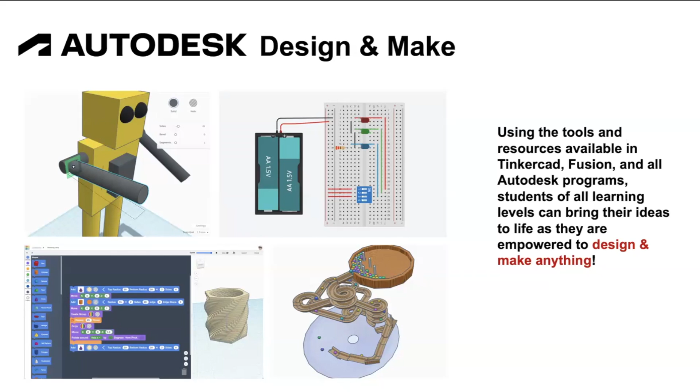And that is what Design and Make is all about. Talking about all the amazing things that your students can use, the tools that they can use to empower their ideas, to bring their ideas to life and really design and make anything. So that is exactly what we want to do. And in tonight's webinar, we're focusing on designing and making with lasers, as well as some other things. It's called Design and Make with Lasers, but we're going to slide in some other important content as well, because these skills are pretty universal and can connect with a lot of different things.

So first and foremost, what is a laser? Well, this describes a machine that uses a beam of light to cut and engrave and remove material. Lasers come in all different sizes. There are small little desktop lasers. There are huge industrial lasers that are used to manufacture tons of products. And I'm specifically talking about beams of light used to do cutting and manufacturing. There are, of course, other types of lasers, like laser pointers and laser cameras. That's not necessarily the same type of light that we're focusing to actually use for manufacturing processes, but it is a tool that can be used to manufacture parts.

And as we talk about our manufacturing groups, there are really three groups of machines that are commonly used in mass production. We have additive manufacturing, where you add material to make a product. This is where 3D printers live. 3D printers will either melt rolls of filament or harden liquid resin, and it will continue to build material layer by layer, and that's adding material to make your product.

Subtractive manufacturing, you would put in your material, like a block of wood or a piece of plastic or a piece of metal, and then that machine would remove it either through a carving method, for example, using a carving mill, which can cut away material, and we talked about that in one of our Level Up with Fusion webinars when we learned about CNC production, or a laser would actually use an engraving process to burn away material.

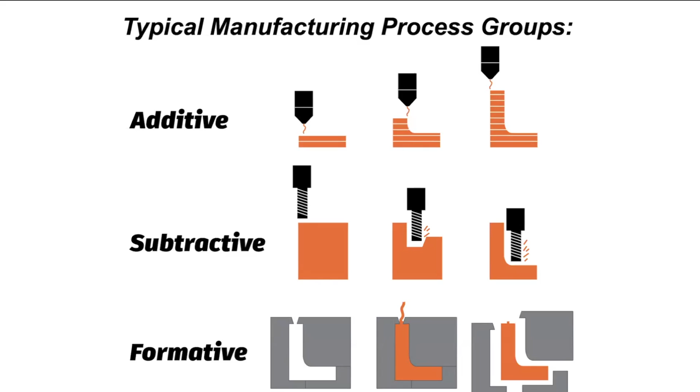And then, of course, there's formative manufacturing, where you might have some type of mold and you pour your material, usually a liquid plastic or something like that, into the mold, and then when you take the mold away, you have your part. And these are used in all different forms of manufacturing. As we talk about lasers, it's important to understand that there are a lot of different types of subtractive manufacturing lasers, and they vary based on size and primarily the types of light sources that they use.

So the smallest and the most affordable laser is typically a diode laser, which uses a really high-powered diode, almost like an LED light bulb, but it's more intense than what you might find in a flashlight, and it's a focused beam of light that can really engrave. Diode lasers don't really cut very well unless it's thin cardboard and paper and things like that, but they can engrave very well, and again, they're very affordable.

Another really common type of laser, and a slightly more industrial one, are CO2 lasers, which use a tube of essentially charged particles and CO2, and focus that beam of light. These lasers are way more industrial, so they can cut and engrave much thicker materials, typically up to quarter-inch wood or so, or give or take 5-6 millimeter wood, or more, depending on the power. They come in a lot of different sizes, and they might be able to etch metal, like aluminum, but they really don't cut metal very well.

To do that, you would need an even more industrial type of laser, like a fiber laser, which can cut metal, or plasma, which technically isn't a laser, but it kind of falls within the same category, because again, we're using different types of light sources or beams of energy to actually cut through our material.

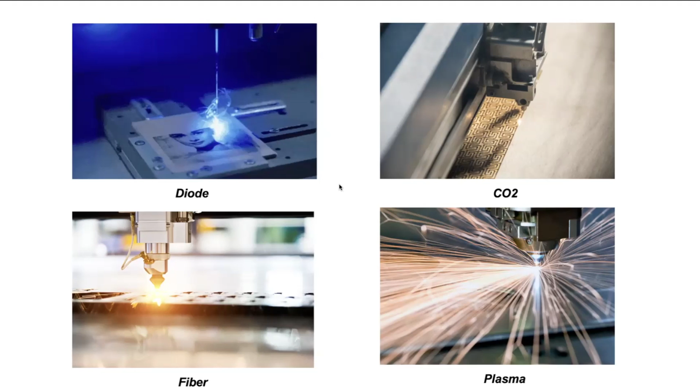And plasmas are much more industrial and do cut through metal, and are used to make a lot of different types of metal products and things that you might see. So as you are choosing the laser for, let's say, your instructional space, if you don't have one, as you can see, there's a lot of different options, and you would essentially have to weigh your budget to purchase one, as well as the types of projects you want your students to be doing, as well as the type of space that you have, right? How much room do you have for these types of things? But just note that you have lots of options.

The other great thing about lasers is they work with a lot of different materials. So you're not just using a laser for plastic like you might be with 3D printing necessarily. Many lasers are able to cut and work with paper, cardboard, wood, foam core, acrylic, a wide range of materials, and they also operate rather quickly.

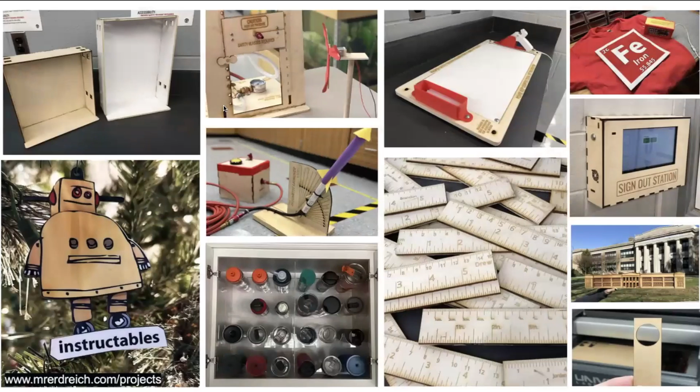And personally, these are just some of the projects that I've taken from my makerspace here. I use lasers in my classroom for lots of different projects. One of my favorite projects for my older students is challenging them to make their own ruler and then use that ruler for the rest of the year, which is a good way to also teach CAD skills. But even using lasers just to make things for my classroom, like sign out stations or rigs to launch rockets and organizers and whatever it might be. This bottle holder is from my home, not for my classroom, but again, just making things for around the house. So it's a really versatile machine that allows you to work with a wide range of materials.

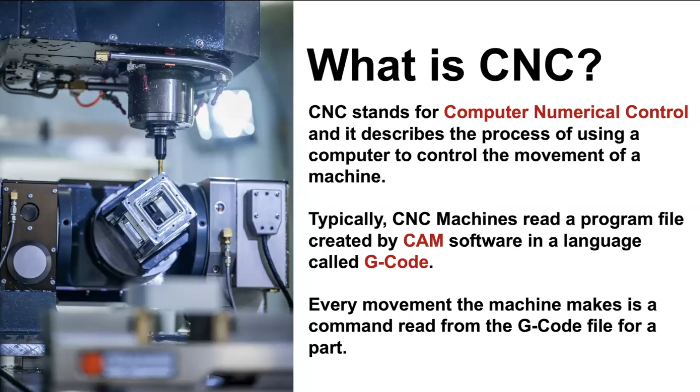Now, I mentioned earlier the term CNC. CNC stands for Computer Numerical Control, and it describes a process of using a computer to control the movement of a machine. And there are a lot of different types of CNC machines, and all CNC machines work in a very similar way. So CNC machines essentially allow us to use computer code, a coded file, to manufacture our different designs. And when we say the term CNC machine, we're usually referring to either a mill or a router, a lathe, a cutting machine like a laser or a vinyl cutter or a waterjet cutter or a plasma cutter, or a 3D printer.

And I bring this up because while these machines perhaps operate in a different way, and while they potentially allow you to work with different materials and a wide range of projects, the skills that your students would have to learn are very common. So, for example, designing for a laser cutter is a very similar process to designing for, let's say, a vinyl cutter to make a decal or a t-shirt.

So I know many of you attending this might not own your own laser, and that's perfectly fine, of course. I'm glad that you're here to learn about what they can do and how the skills that your students are learning can allow you to access these types of things. But just note that these skills aren't only for laser cutting. They're universal for these types of machines. So I'll show you later on how you could do something similar with, let's say, a vinyl cutter to make a vinyl sticker. And even still, the types of skills that allow you to work with laser cutting can also be used for 3D printing or working with mills as well.

So teaching our students manufacturing processes in general is a really fantastic universal skill. They might learn how to use one machine in your classroom and then go off and have a future career and be able to transfer those skills to an entirely new experience.

Now, what makes lasers unique compared to some of these other CNC machines is that they're actually two-dimensional. And that doesn't mean that we're only making perfectly flat things. Of course, there's three dimensions to any physical object we can hold, but they only have two operating axes, typically. And what I mean by that is the types of travel our machines can do are called axes. So for example, a 3D printer, which I think many of you might be familiar with, can travel in three axes.

It can move left and right, which might be X, forward and backwards, which might be Y, and of course up and down, which might be Z. A laser typically just moves in X and Y. And the third dimension of your part that you make with the laser actually comes from the thickness of the material. So let's say I put in 1/8 inch or 3.175 millimeter wood in my laser. That's how thick or how tall my part will be.

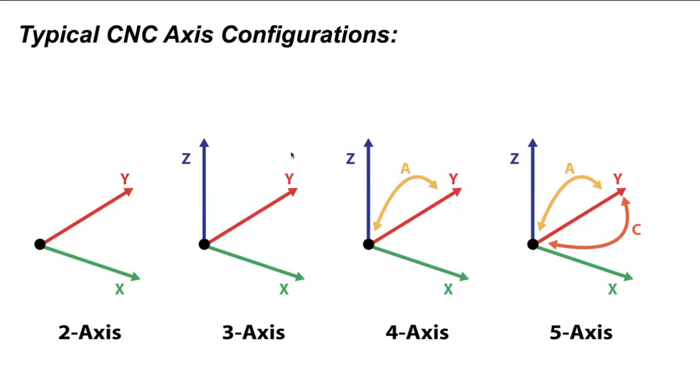Now, before we dive into actually how to design for lasers and get into some hands-on projects, let's talk laser safety, because if you are considering getting one, there's a few things you need to know. So first and foremost, as I mentioned, all lasers use a beam of light of some type to cut things. And those emitted lights can be harmful to your eyes. So first off, a lot of lasers have a tinted, protective canopy. So the glass would actually be covered, and it would allow you to look at the laser, and the glass is tinted, and your eyes wouldn't be put at risk.

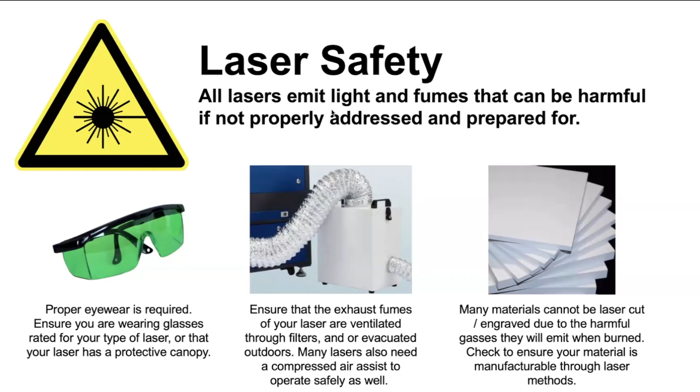And then there are some materials that cannot be laser cut. So if there's a material that when it's burnt will emit toxic gases, like, for example, PVC, you don't want to burn PVC, right? As I mentioned, there's a lot of different materials that you can use, but you have to make sure that the materials that you're using, the glues or the resins that made that material, are not toxic, or else burning them could be hazardous, even if it is being vented. So a couple unique safety things that we need to consider for working with lasers, especially in the classroom, that we don't necessarily have to consider with other types of manufacturing processes.

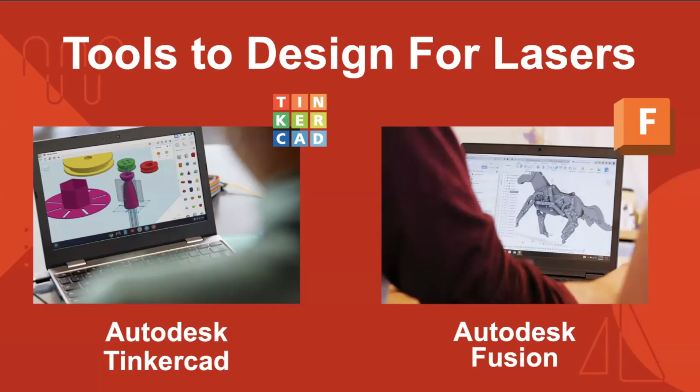Now, let's get into how to design for these things, right? So we have two programs that we'll talk about tonight. We have Tinkercad, which is fantastic for younger students or students just getting started with CAD. And then we have Autodesk Fusion, which is a much more industrial, much more advanced CAD program, which is well suited for students at the high school age group.

So both of these applications can be accessed via an app or a browser. So you can log on to Tinkercad or Fusion in the web browser on pretty much any device. Tinkercad also has a wide range of apps for tablets, and Fusion has an offline version for Mac and Windows computers. Autodesk Tinkercad and Fusion are completely accessible for free for students and educators.

So let's say that you have younger students and you want to be able to manage their passwords. You can actually create their accounts in Tinkercad as a teacher. And again, even for Autodesk Fusion, you have to create a free account to be able to access it, but both teachers and students can access it, although there are age restrictions based on your region. So for example, in the United States, that would be 13 years or older. And again, that would vary depending on where you are for Fusion.

Teams and classes are two different resources that do a very similar thing. So in Tinkercad, you can create a class, and this would allow you to have your students join your class. You'd be able, as a teacher, to see their work, go into their assignments, provide feedback, things like that, and be able to see what students are working on.

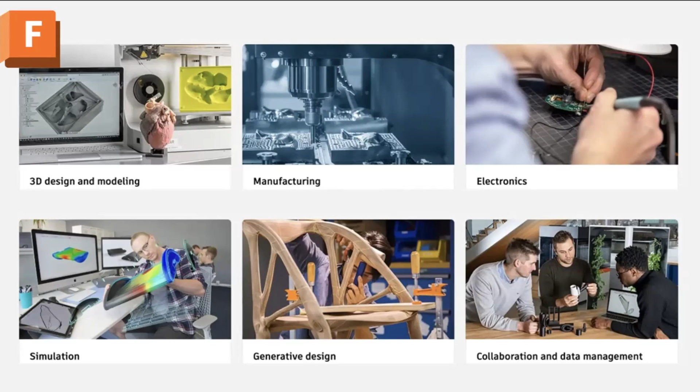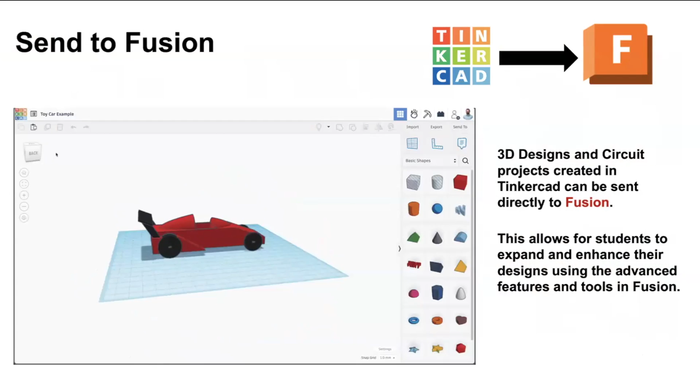And there's also another cool feature, which I will show you in just a few moments, which is how to send your designs from Tinkercad to Fusion, which will allow your students who maybe have been working with Tinkercad for a long time and are ready to kind of elevate their skills to a higher skill level. They can easily transfer their designs from one program to the other to be able to access the more industrial, career-focused skills and features of Fusion.

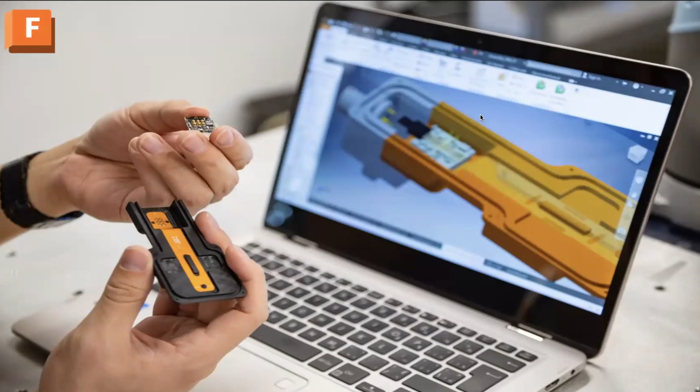And the reason that you might want to do that is, of course, Fusion is designed to mimic what professional designers and engineers are doing. So Tinkercad is designed to be a very easy to learn, very intuitive design program for students of all ages to kind of get started with CAD and manufacturing. And then Fusion is designed to allow students to access all the tools, all the resources that a professional designer or engineer might have, so they can really bring their products into that real world scenario. And again, tonight we'll be looking at both from the lens of designing for lasers.

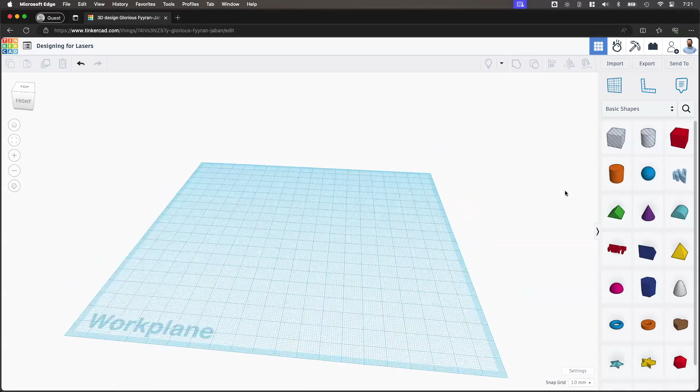So I'm going to flip my screen, and I'm going to head over to Tinkercad first. We'll look at Fusion in just a bit here. All right, so I'm signed into a Tinkercad design, and I have just an empty 3D design here. And if you've never used Tinkercad before, we're in the 3D design space. And the way that the 3D design space works is that you can essentially grab these different shapes, and I can manipulate the shapes. I can kind of lift them around and move them as I go.

And you can see that there's measurements on the corners of the shapes here. I'm currently working in millimeters, but I could change my unit, and I could work in another unit if I wanted to. And if I wanted to, I can actually click on these dimension boxes and punch in dimensions for my model.

And I can grab multiple shapes and I can combine the shapes. So for example, if I were to grab this cylinder shape and put it on the corner of my box shape like this, and if I were to select both these shapes and group them, I now have this solid part as well. And in addition to having solid shapes, you'll see that we also have this option for hole shape. So if I ungroup this and if I turn the cylinder into a hole, and now I group my two shapes, I actually cut.

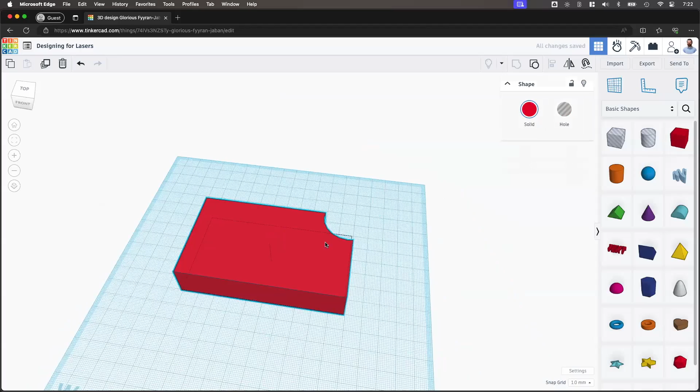So we can use hole shapes to cut into solid shapes and solid shapes to make solid parts for our design. Now, the biggest difference I need to explain: typically when people are just getting started with laser cutting or designing for, let's say, a vinyl cutter or something like this, using a 3D design application like Tinkercad's 3D design space we're in now to design for 2D can be a little difficult to learn at first.

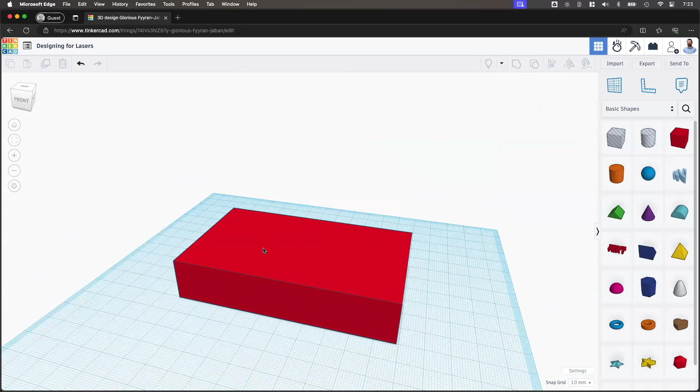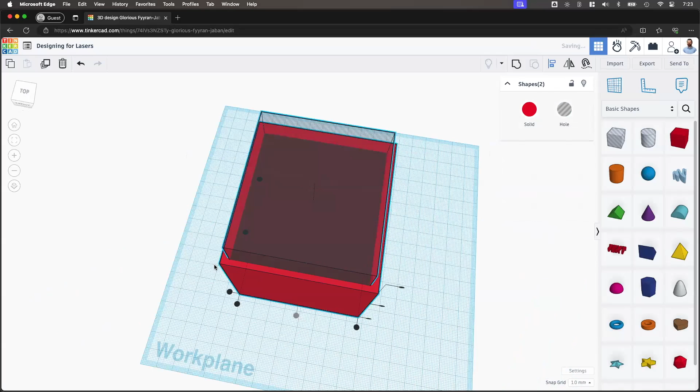So for example, let's say that we want to make a box. Okay, so I'm just going to make my box a little bit bigger. All right, and I'm going to hollow out my box. So I'm going to duplicate this. I'm going to make this a little bit taller and a little bit smaller and raise this up a bit and set this to be a hole. I'm then going to select both shapes and use my align tools to align my shapes. And when I group them, I have a box, right?

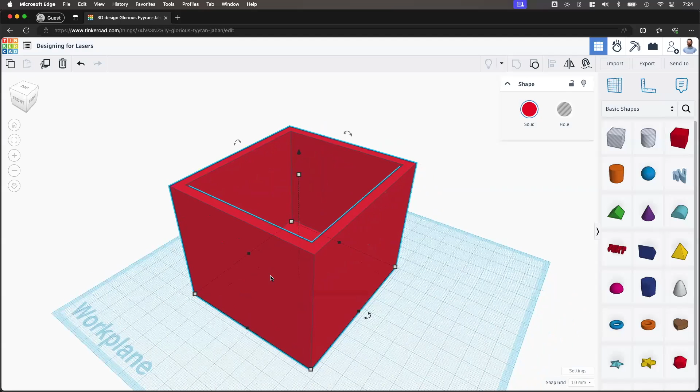So here's my box. Now, if I wanted to 3D print this box, I could just hit export and download this for 3D printing. And I could 3D print this box, assuming that my 3D printer was big enough to print it. But if I wanted to laser cut this box, I can't do that. And that's because we learned that lasers are really two-dimensional machines. They can make 3D things, but they can't necessarily make a 3D thing like this. It can't add material, and I might not be able to fit this. So if I wanted to make a laser cut box, I'd have to design this in a completely different way.

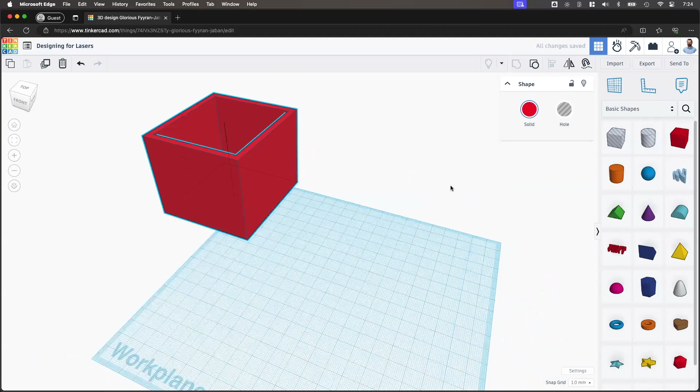So I'm going to leave this box off to the side. This is our 3D printable box. If I want to make a laser cut box, I would actually have to design this in, let's say, flat panels, where I might make a wall like this, and I might copy this wall a few times. Let me rotate this around. Line up my walls here, copy this again, and let me just make one more copy, and we'll give ourselves a bottom of our box. I'm not really putting too much time into my measurements right now, so forgive me, but this is also a box, albeit slightly bigger because I didn't measure it. Let me scale this down a little bit so they sort of match, right?

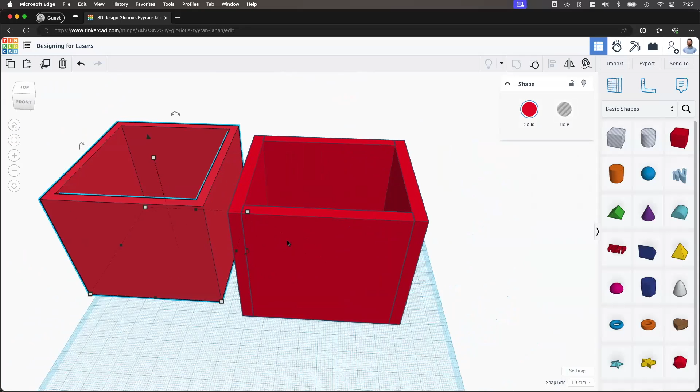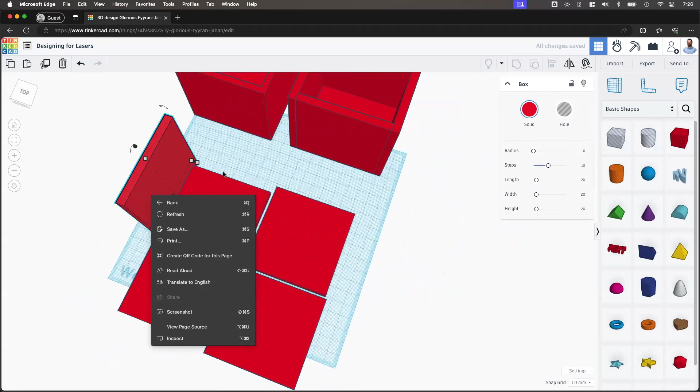So this is a solid box that could be downloaded for 3D printing. This box has been made out of panels, flat panels. And if I wanted to, let's say, laser cut this box, what I could do is I could take my panels and I could space them out and lay them down flat for manufacturing like this. So I might design my box in 3D, how I want it to look. And what the laser would need, because again, lasers are two-dimensional machines, is a flat packed design here, where I have all of my pieces for my box laid out like this.

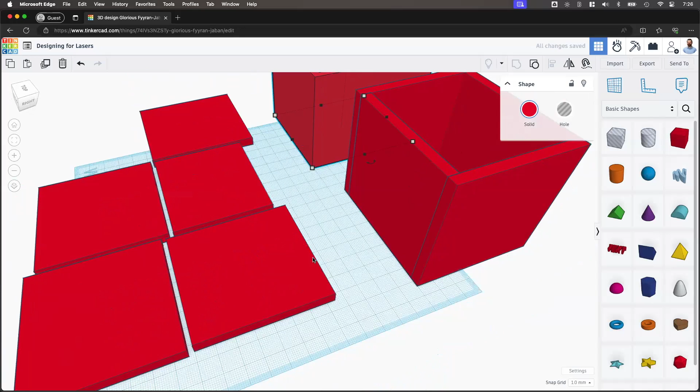And then what I could do is I could cut these 5 panels out of, let's say, wood or something like that. And after I cut those 5 panels, I could then assemble the box to be 3D like this using glue or something, right? So they would fit together. And that's the biggest difference. With 3D printing and with laser cutting, you can make very similar things. Again, we can make boxes, name tags or keychains or lots of other types of projects, parts for catapults, etc. But 3D printers are adding materials, so you can make solid 3D shapes like this. For lasers, we kind of have to think in terms of two dimensions, right? So again, designing these flat panels like this. And that's the biggest difference here as we're considering designs.

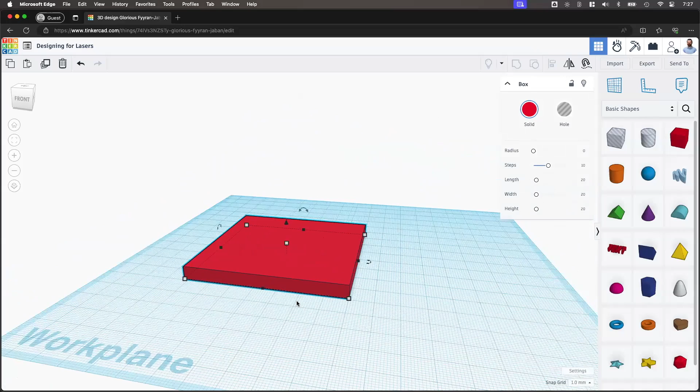Now, the next thing I want to talk about is what does the laser actually see when we go and download? So I don't really need these boxes, so I'm going to throw them away, and I'm just going to keep one of these panels. When you have a design in Tinkercad and you download it for laser cutting, all the laser sees is what's touching the work plane. Because essentially what happens is your design is flattened, and the part that's touching the work plane is what the laser will see.

So for example, let me make this part slightly more interesting. Let me add, let's say, 2 holes to this plate, like this, and let me grab another cylinder. Now, if I raise this cylinder up off the work plane like this, when I download this part for laser cutting, it won't see it at all. Because again, it only sees the features that are touching the work plane.

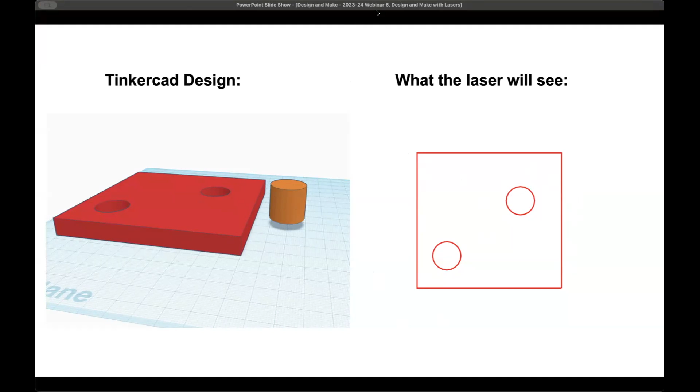Now, if I head back to Tinkercad, which I'm doing slightly slowly, here we go, back to Tinkercad. Let's say that I delete this cylinder, and let's say that these holes don't actually cut all the way through. They just sort of score the top. All the laser is going to see is, again, what's touching the work plane. So it's not even going to notice that these holes are here.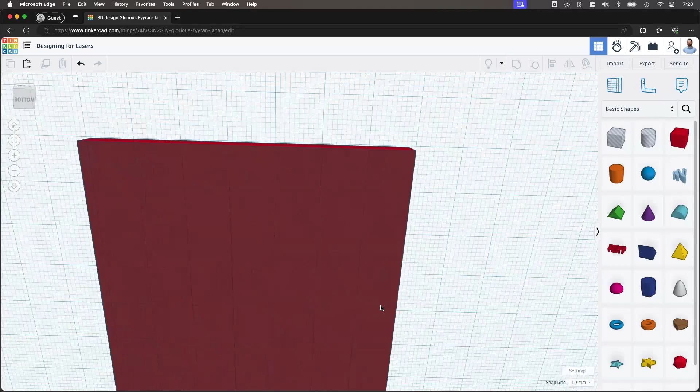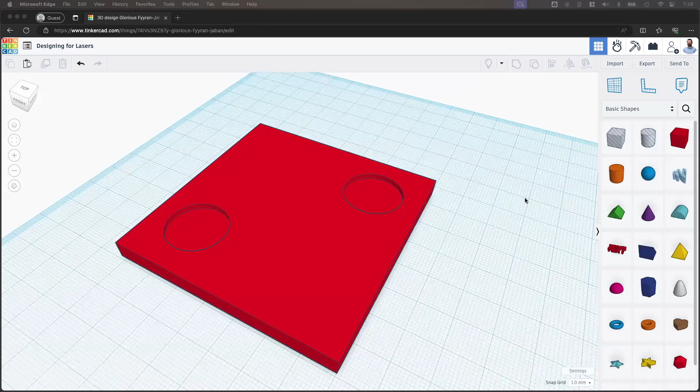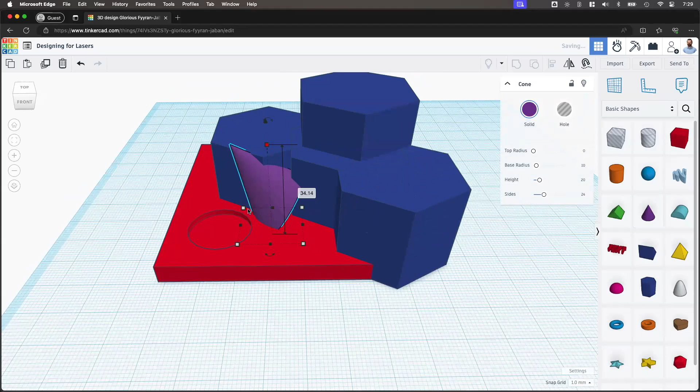Let's say that I make a really elaborate design like this, and it's 3-dimensional and looks kind of cool. And there's some type of cool cone thing happening over here, some type of crazy shape. And I group all this together. If I were to download this for laser cutting, and let me just fix my cone because I'm actually poking through, please hold. Okay. If I were to download this for laser cutting, all that would be seen is what I can see from the bottom, right here.

And to emphasize this, I'm going to turn off my little work plane just temporarily. This is what the laser would see. It would miss all of these parts that are sticking up. So the height of the model, all that's kind of irrelevant.

Let's say that I really was trying to make this box that I showed you earlier, and I had these flat wall panels. The thickness of the panel in Tinkercad doesn't actually matter. Right now, this is set to be 20 millimeters. But if I put in 3-millimeter wood in my laser, then this panel, if I cut it, would actually be 3 millimeters. So you have to remember that we're using a 3D editor to make our designs. But again, as we download these things, it will see what's touching the work plane.

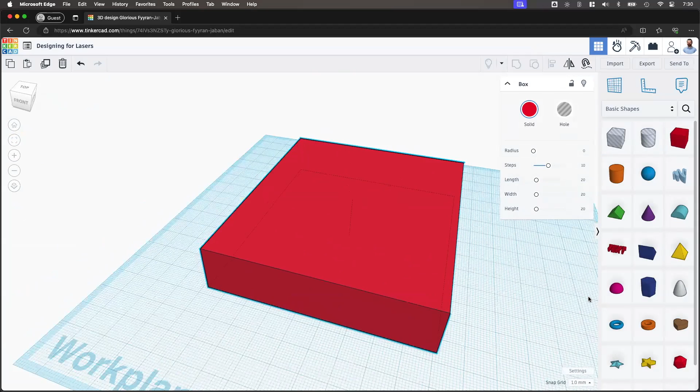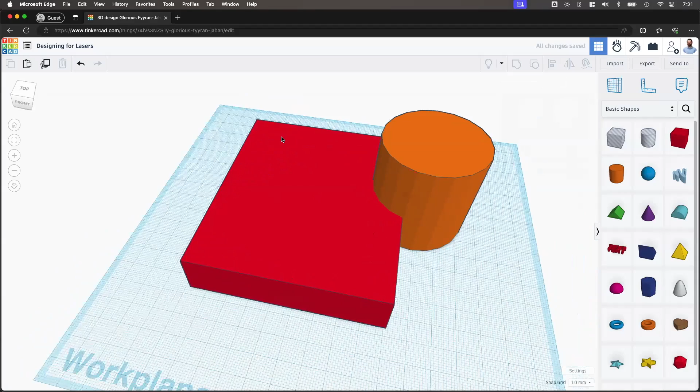Now, something that I've been doing to make my life a little bit easier here is I've been changing my view a lot. When you're designing in 3D, you often need to change your view to be able to see things accurately. So I'm orbiting around, I'm looking at things differently here. And when we design in 2D, something that we like to do often is look at the design from the top view. So I might click on the word top here.

But you'll notice that there's still 3D shadows happening. And that's because even though I'm looking at it from a top view, I'm still in a 3-dimensional perspective. So something that I can do is toggle my perspective right here by pressing this button at the bottom of my sidebar. And if I switch it to orthographic view, watch what happens to my shape. Specifically, look at the side of this cylinder here. It will flatten the cylinder.

And it puts me in a 2-dimensional perspective view, which makes looking at flat designs a little bit easier. So it allows us to design things more simply. It allows us to design things from a 2-dimensional perspective, like what a laser would see.

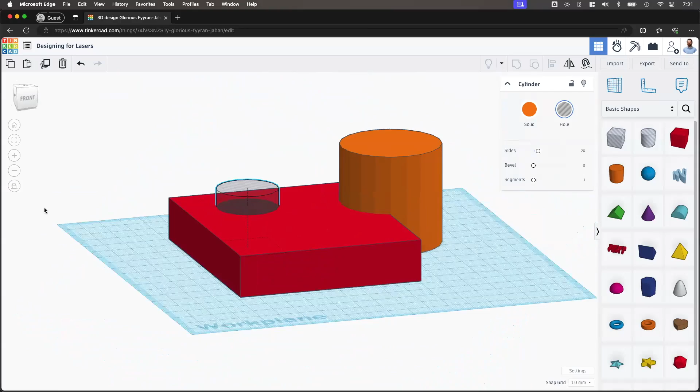And if I orbit around, if I'm in an orthographic view, everything looks kind of funny. So we want to make sure that if we're working in 3D like this, we're working in our 3D perspective view, so everything looks as it would if it was in the real world. And if we want to look at something from the top, we switch to our orthographic view so it represents what it would look like for our laser.

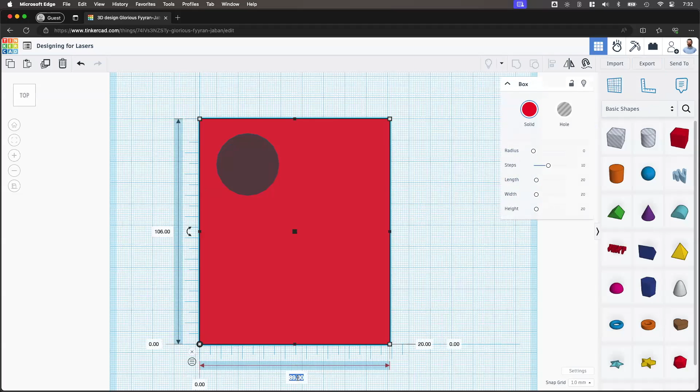Something else that's really, really handy is that lasers are very accurate. They're very accurate machines, which means that we can put pretty accurate and tight tolerances. So what I just grabbed was the ruler tool, and I dragged the ruler out to the corner of my shape. And we can use the ruler tool to accurately place dimensions on all of our shapes.

So I can not only put dimensions on the parts, I could use the ruler to set dimensions and distances between parts. So for example, because I have the ruler in the corner of my shape here, I can set the distance from the edge of my hole to the edge of my plate to be exactly 15 millimeters, and you'll notice that it's moving it around.

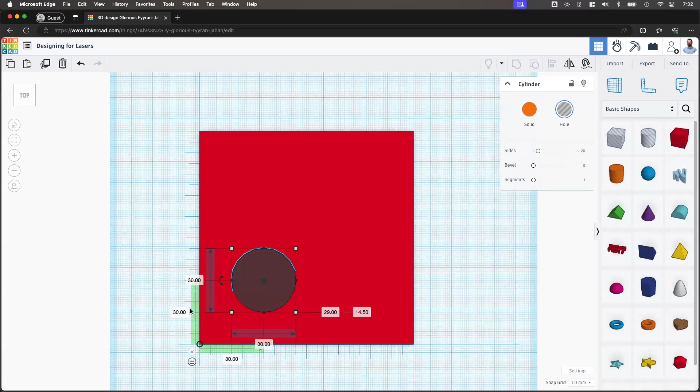You also notice that right now it's measuring from the edge of my cylinder, but I can toggle between using the edge or using the middle. So now I'm setting the dimensions to be from the center of the cylinder. And let's say, for example, I wanted this to be 15 millimeters from this edge. I could always move my ruler over to this edge now and flip the ruler around and then use the ruler to set the same dimensions on this side as well.

So because our lasers are quite accurate, we can strive to make really accurate and well-dimensioned designs in Tinkercad as well. And using the ruler tool is a great way to do that. Another one of my favorite tools to use when designing laser cut projects, especially for making boxes, is the duplicate and repeat tool. So let's say that I want to make a box where the panels sort of interlock, rather than having to use glue.

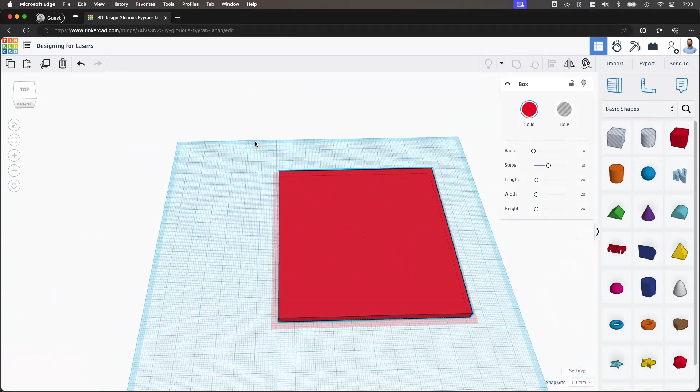Well, what the duplicate and repeat tool does is it allows me to not only make copies of shapes, so bear with me for one sec, I'm just going to make one little tooth here for my box. So here's my first tooth that's going to overlap, kind of like a dovetail joint if you're familiar with woodworking. And I want to make a bunch of copies of these, but not only do I want to make copies, I want to move them.

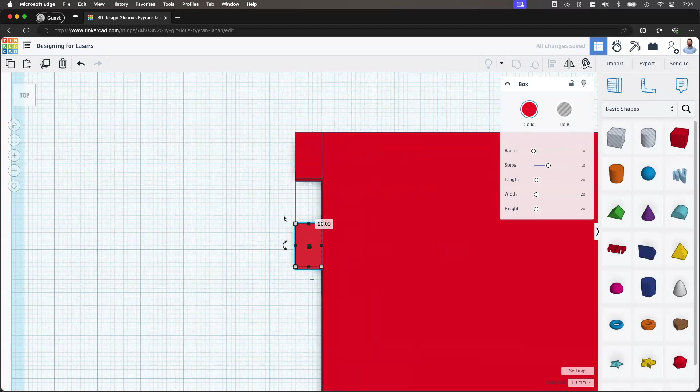So I'm going to press duplicate and repeat, and let me just set this to be a specific size. Okay. I'm going to press duplicate and repeat, which is right here. And I'm going to move this piece 20 millimeters without letting go. So without clicking away, I just moved it 20 millimeters. Now, when I press duplicate and repeat, it not only copies this piece, it copies and moves it the same distance. So it moves it 20 millimeters.

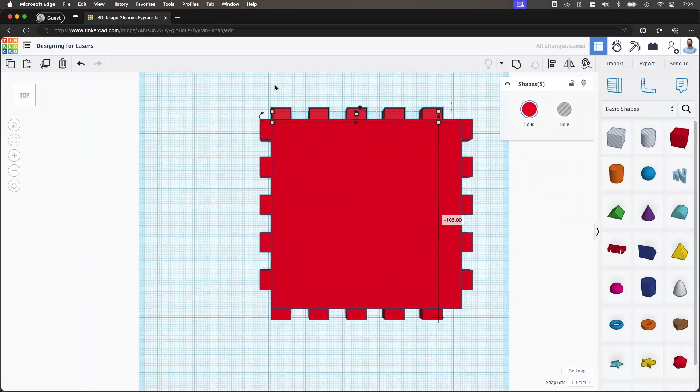And then, of course, I could copy these and bring those over there, and maybe copy them and rotate them and bring them over here, and then bring them over here, and group all these pieces together, and I have a nice little dovetail box where if I then grab the second one and flip it around, these box panels would fit really nicely like that.

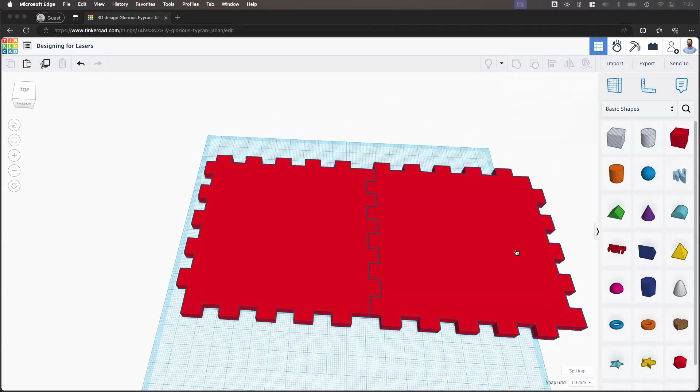So duplicate and repeat, really awesome tool. Not just for laser cutting, but I find that we do a lot of patterns and types of cuts in typical laser cutting projects, and that tool is super handy for that. And another really cool thing that you can do, which we actually talked about in our Artscapes webinar a little while ago, is importing SVG images.

So we can press this import button and we can import SVG image files. Give me one sec, I'm going to drag and drop one right on here. All right, and SVG image files can be made in a lot of different programs. For example, we're going to make them in Tinkercad, but you can also make them in other types of photo and graphic design editors and things like that.

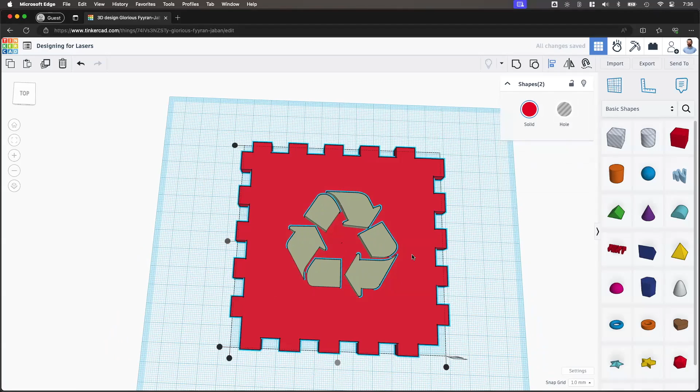You can also find SVG images that are free for use all over as well. And this is just the recycling symbol that I've imported, and obviously it's a really accurate logo. I think this would be a rather difficult shape to make in Tinkercad, but I could import this image and, let's say, set this to be a hole and group it. And now when I would download this for laser cutting, this would now have this nice logo here that I could then go ahead and cut out of my box panel by importing that type of image, so SVG file types.

I set this to be green just because it reminds me of recycling, but it's important to note that color wouldn't transfer. Again, when it downloads this design, it downloads just the bottom profile. It doesn't know that this is green or whatever the color it is. That would come from the material. So if I were to put green acrylic or green plastic into my laser to cut this panel out, it would then be green. But the file won't distinguish color in your design. It just downloads, again, whatever is touching the work plane is exactly what will be downloaded.

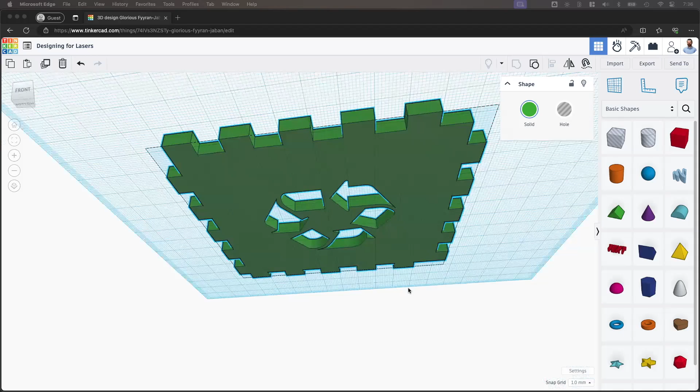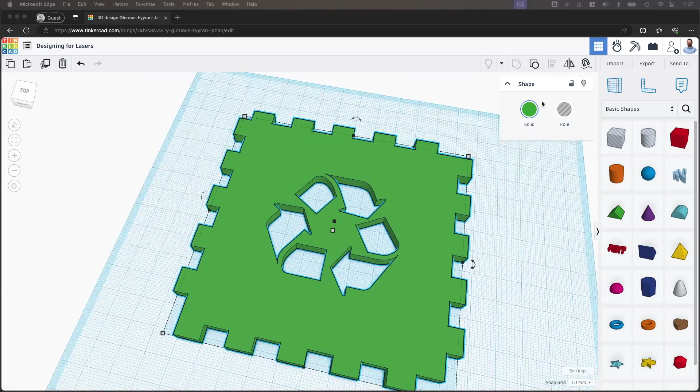And if I wanted to, for example, distinguish between cutting and engraving, so I might want to cut this outer edge, but engrave this inner recycling symbol, like burn it and etch it. That wouldn't happen here in Tinkercad. You would set those settings later on in the CAM stages, which we'll get to in just a moment. Now, if I want to download this, I would hit export. And I could click SVG to download this for laser cutting. And then I could bring it into my laser cutting CAM, which I'll show you in just a moment.

Before I do, I want to show you a couple useful tools in Fusion to do something similar. I know I have a lot of high school teachers with me here, so you might be considering Fusion. So let's say, for example, I want to send this to Fusion. I could click Send To. I could select Autodesk Fusion. If I wanted to, I could rename the file. If I was a student sending it to a class or a Fusion team, I could choose that here and I could send it to like Mr. E's period 1 if I was a part of that.

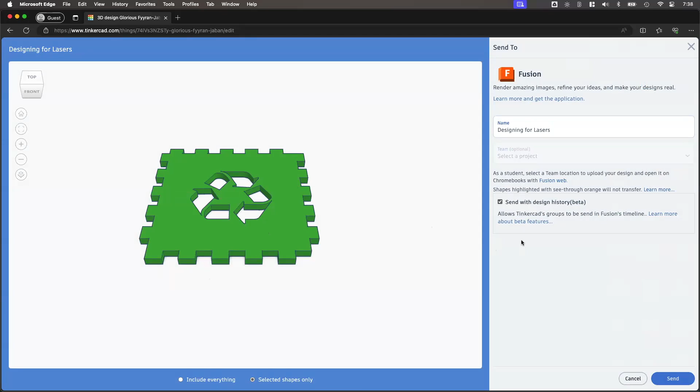And something that's new actually for Fusion is sending with design history, which will not only send the file, it'll send all the individual shapes that I created too. So I can actually go back and manipulate my Tinkercad design. So I'm going to send this and let me switch my screen here. Give me one sec to head over to Fusion. Here we go. All right. So here is my Autodesk Fusion that I have going on here. Oops, let me make this full screen.

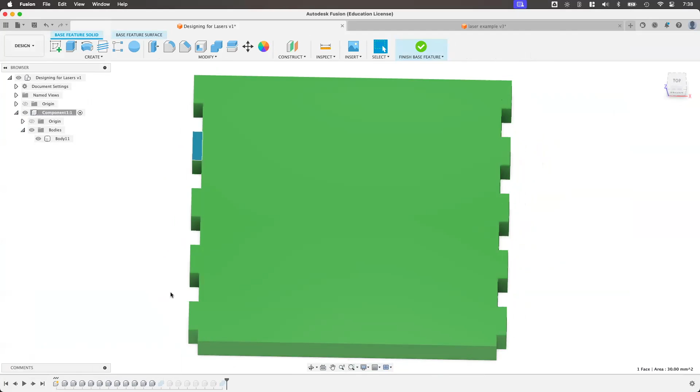All right. And here's my part, right? So here's my Tinkercad design that I've imported. And as I mentioned, I have this design history, which is down here at the bottom. So let's say, for example, I want to go back to before I grouped all these shapes together. I could do that. I could come back to this part and notice that all of these boxes are individual boxes that I have here before they were grouped. And that's actually a new feature. But when you bring something into Fusion, you can manipulate it.

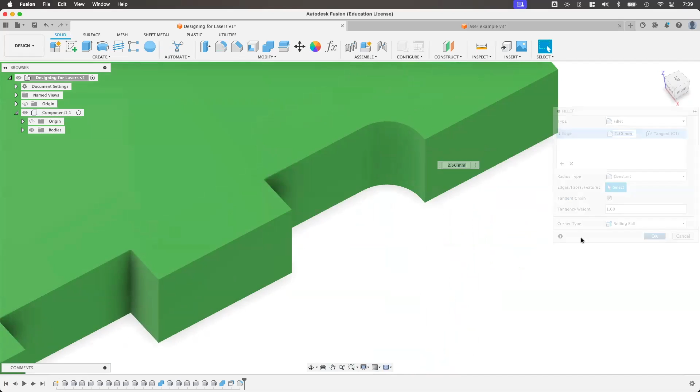So let's say, for example, I wanted to make something thinner or thicker. I could do that. I could add to this. So let's say that I wanted to round my corners. I could add a round on them. I, of course, could access all of Fusion's design features to manipulate my Tinkercad designs. I'm going to make a new Fusion design just to show you what if we want to start from scratch. So this is a brand new Fusion document.

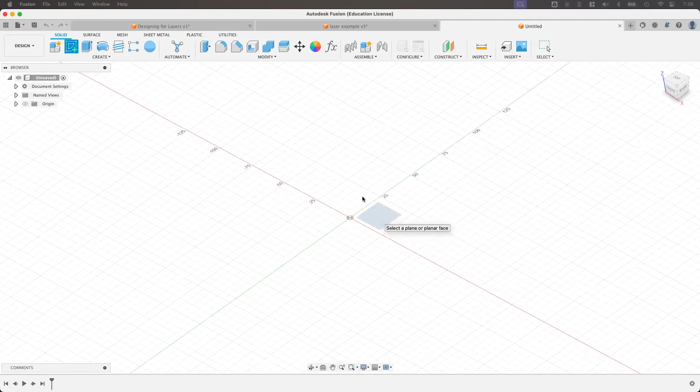And to start designing something new in Fusion, what we would do is we would start a new sketch. So I'm going to click this Create Sketch button and select one of my work planes. So I'll just select the top work plane. So we're kind of looking top down on our part, just like we did in Tinkercad. And I could use any of these sketching tools to design something. So I might grab my rectangle tool and set a box. And I could use the dimension tool to set dimensions, not 10.

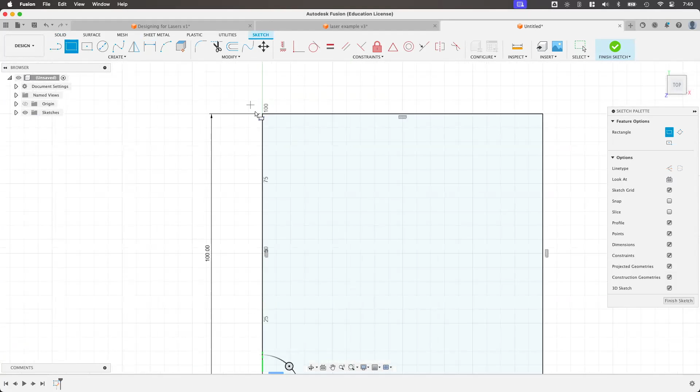I meant to say 100, like this, right? Let's say that I did want to do the same type of dovetail pattern that I did in Tinkercad. Perhaps I draw another box over here where maybe I set this to be 10 millimeters by, let's say, 3.175 millimeters. And we have a pattern tool in Fusion.

And I know I'm doing this rather quickly, but this is more to give you a sense of the differences between Tinkercad and Fusion. You can see that in Fusion, we can create sketches for everything that we would typically do as we go here. And in Tinkercad, you would start with a 3D shape, which differs, right? So in Fusion, we're not starting with 3D shapes. We're starting with a 2D sketch that we could turn into a 3D shape if we wanted to. There's lots of different tools for sketching shapes, for patterning shapes like this.

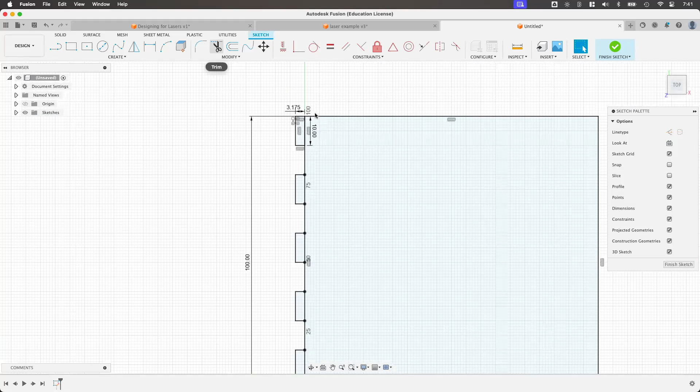You'll notice that because I drew a big box and a little box, these parts are not connected. So if I was actually going to laser cut this, what would happen is these little dovetail pieces would cut right off because there's this line here dividing it. But then I could use my trim tool to, let's say, cut away and turn this into a solid piece like so. So I could actually cut out this dovetail shape.

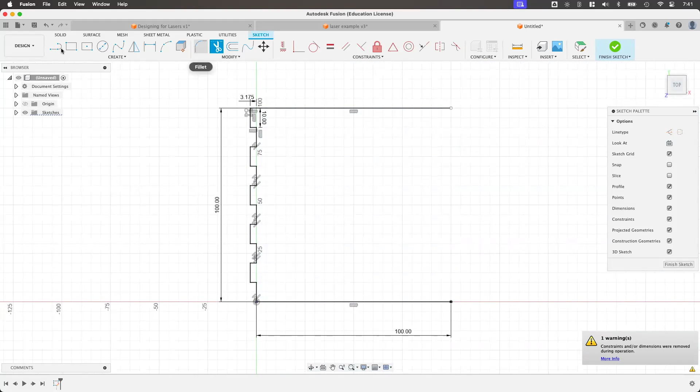And there's also some other useful tools like a mirror tool. So let's say I draw a line right down the center here. I could then use my mirror tool to say grab all of these dovetails on this side and mirror it across the center. And that would give me my dovetail box.

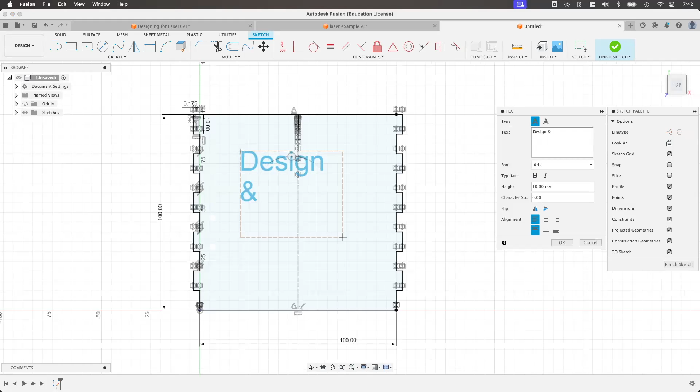And there's also a lot of other tools in Fusion. So one thing that you might find is you have a lot more text tools in Fusion than you might have in Tinkercad. Just a much more advanced text editor as you go with access to whatever fonts you have on your computer, which is also great, as we have here. And of course, I can kind of manipulate those things, right?

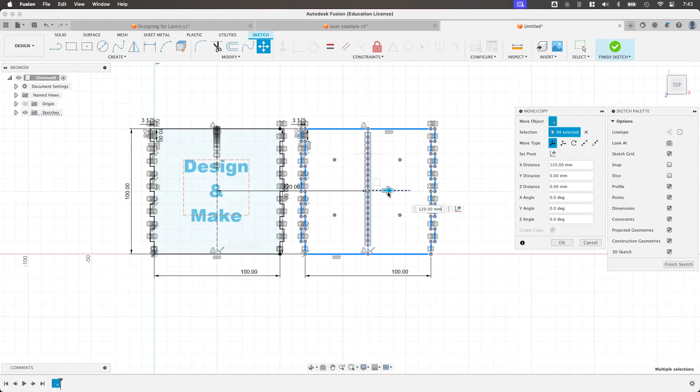And if I wanted to, I also could, let's say, make a bunch of copies of these, right? So let's say that we want to make a box. I might copy this a couple times. Let's do this once more, like so. I guess I would have to do it one more time. You do need 4 walls to work your way around the box. And now I have my panels. Now, when I press the checkbox, that will complete the sketch. So here's my two-dimensional sketch.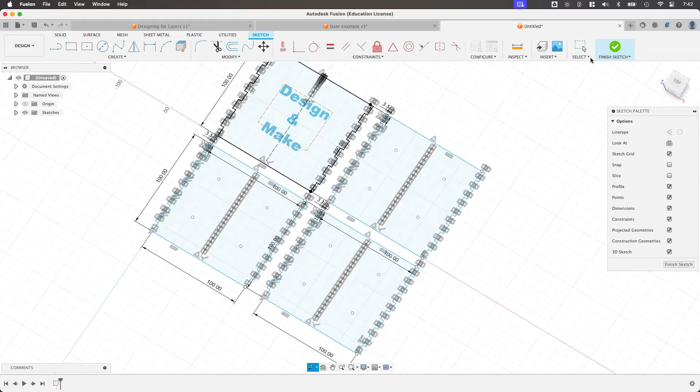If I want to 3D print this, I might go ahead and extrude these panels so they had some height to them, like this. And then that way they would be 3D parts, right? But for laser cutting, as we know, all we need is a two-dimensional sketch. So this would be ready to be laser cut. And I could right-click on my sketch and click Save as DXF, which will allow you to bring it out of Fusion and bring it into another program if you want to laser cut it.

But Fusion is not only a CAD program, it's also a CAM program, which means we can actually prepare our designs for manufacturing as well. And to do that, you would switch to your Manufacture tab. And here, we can actually say that we want to fabricate. You'll notice that there is a cutting profile along with milling for CNCs, turning for lathes, additive for 3D printing as well. But I could actually set up a laser cutting project, assuming that your laser cutter was compatible, right?

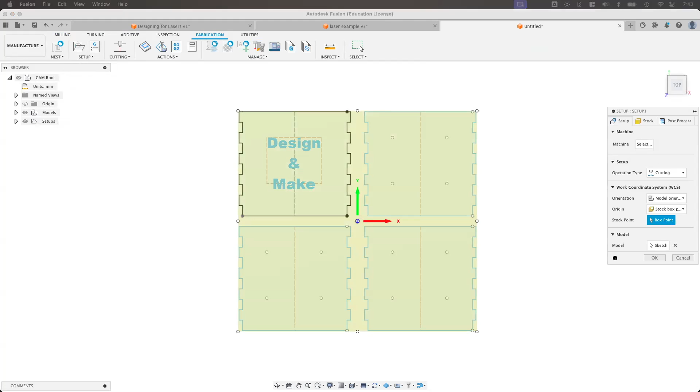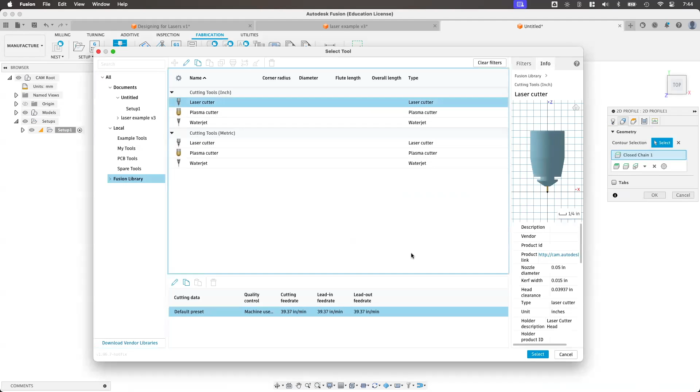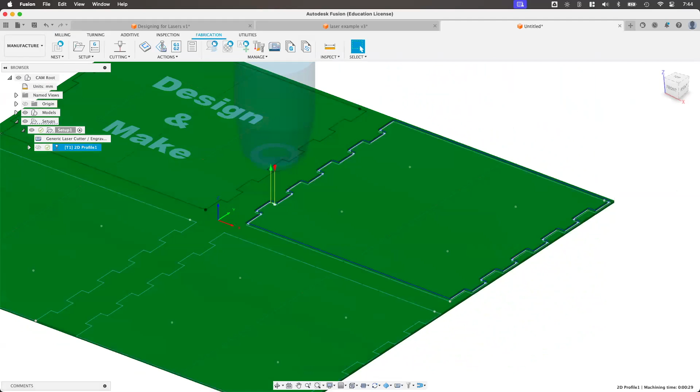But I could actually simulate and see that Fusion is set up to program a laser cutter to actually go around and cut out my box. And this is called CAM. Now, in most cases, though, your laser that you purchase would probably come with a CAM program that you could bring both designs from Fusion and from Tinkercad into. And I also just want to show you, I switched back to my slideshow here.

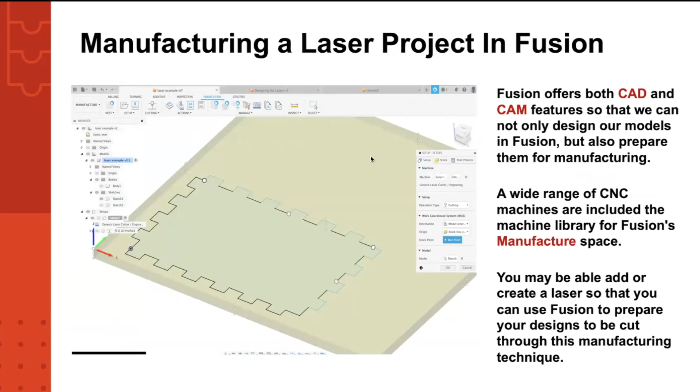And the production process for working with the laser would be as follows. You start with your design in CAD, whether it's Tinkercad or Fusion or Inventor, one of your CAD programs. You would then prepare that design for cutting in CAM. You then have to set up your laser. So for example, put in the wood or the material that you're using, make sure that you have your ventilation hooked up, and then you'd go ahead and manufacture.

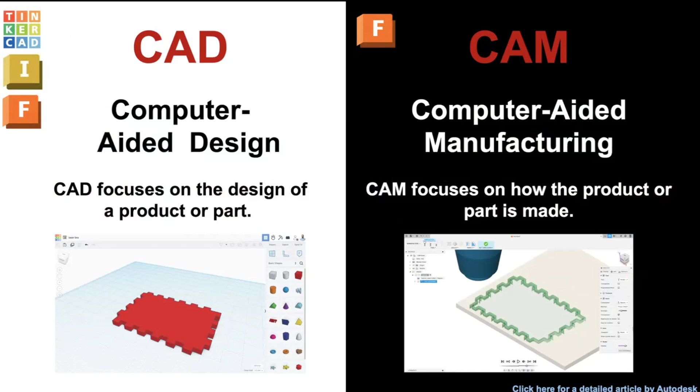Now, the difference between CAD and CAM is that CAD stands for computer-aided design, and that's where we design our parts. CAM stands for computer-aided manufacturing, and that is where we prepare those designs for manufacturing, as I just showed you in Fusion. So Tinkercad, Inventor, and Fusion are CAD programs. Fusion is both CAD and CAM. But as I mentioned, your laser probably has a CAM program. Lasers usually have unique CAM programs to their specific manufacturing model.

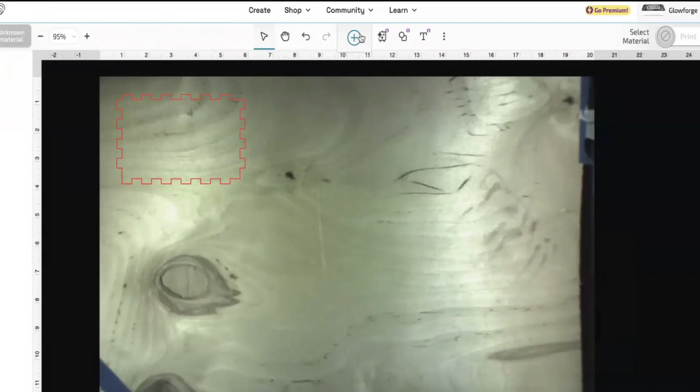So for example, this is a screenshot of Glowforge's CAM program here. And you can see that I've imported my box here to actually prepare it for cutting, like we did earlier in Fusion, which you can do as well if you imported and set up your laser in Fusion to do so.

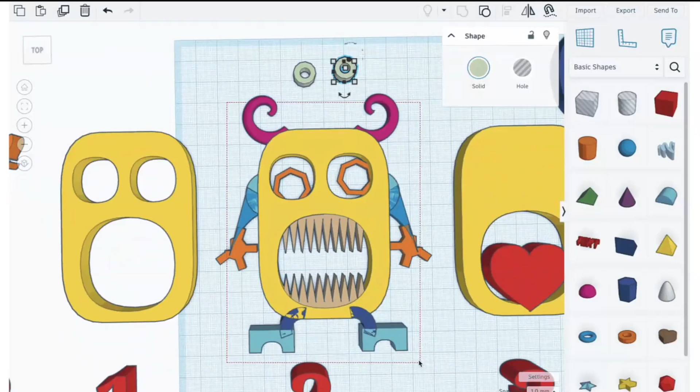So for this Plywood Monsters project, you can see that we started in Tinkercad. This is the example Tinkercad design that Mikeasaurus shared in the Tinkercad article, which we just dropped the link for in the chat. So I could select the parts that I want to download, and then I'd hit export and download as SVG, like I showed you earlier on.

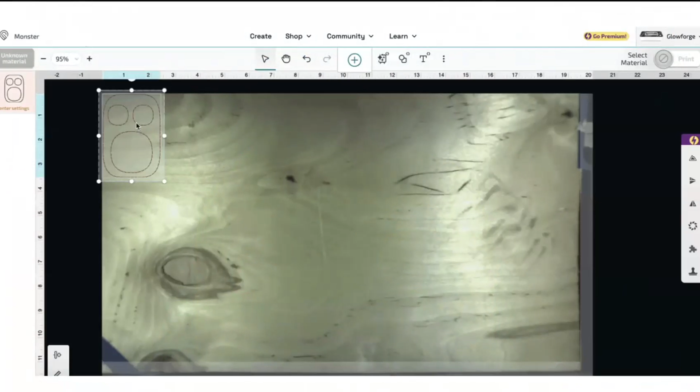I would then head over to my CAM program, and I would import that SVG file. Notice that it's not yellow. It doesn't save any of the colors from Tinkercad. And I could position it wherever I want to cut. This happens to be a brand new piece of plywood, but I might want to position it wherever there's space if I'm using a cut piece.

And what you can see here is that we're setting: are we cutting? Are we engraving? So the difference between me cutting a Tinkercad design or engraving a Tinkercad design happens right here, where I would open up my settings and I would say, okay, I'm cutting this line, and specifically I'm cutting it out of 1/8" wood or acrylic or leather or felt or whatever the material is. So those settings happen at the CAM stage.

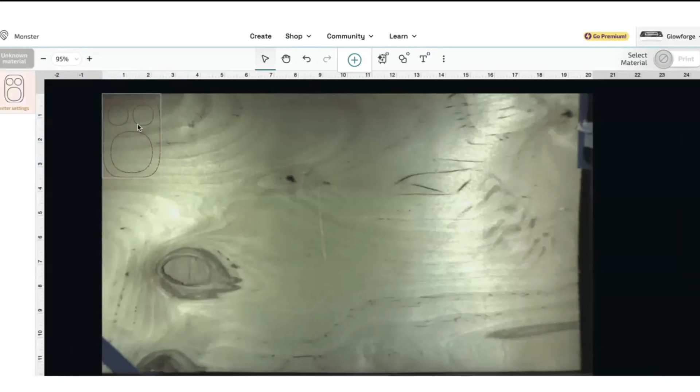Again, CAD is where we design our models. CAM is where we set all the settings for manufacturing. How would we cut it? What material are we using? Very much like if you're familiar with 3D printing, you might use a slicer program to choose which filament you're using and what speed you're printing it at. That's exactly what you see here, but for laser cutting. So we're choosing what material we're cutting out of, if it's being cut, if it's being engraved, that's all happening here.

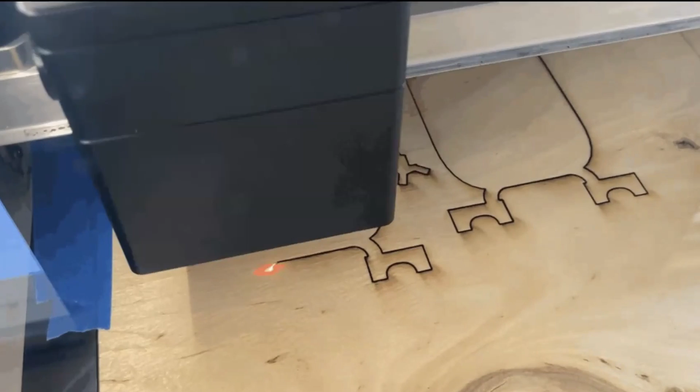We then send that design to our laser and we watch our laser cut, which is super mesmerizing. And this is sped up slightly, but this is a very fast cutting process. I mean, it depends on the power of your laser. It depends on the thickness of your material. But in general, lasers are one of the fastest manufacturing machines. So cutting out a plywood monster like this really would just take a couple minutes, where 3D printing it, of course, might take 20, 30, 40 minutes, depending on the thickness and the settings of your 3D printer.

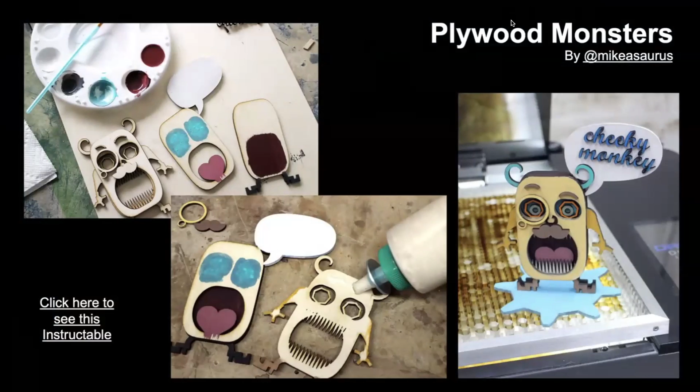And then again, we pulled some images from this amazing Instructable to show you that the next steps for this project would be, after you cut out all your parts, you might add some paint, you might glue them together, and then you have these adorable plywood monsters.

But I mentioned earlier on that these methods are super similar to what you might do for, let's say, a vinyl cutter or a water jet cutter or a plasma cutter. So the production process for working with the vinyl cutter is almost exactly the same. We'd start with our design in CAD, and you would download the same two-dimensional SVG file. I'd bring it into a CAM program for my vinyl cutter, not for my laser, which would again allow me to set the settings for the type of vinyl I'm using, whether it's like t-shirt vinyl or it's adhesive vinyl.

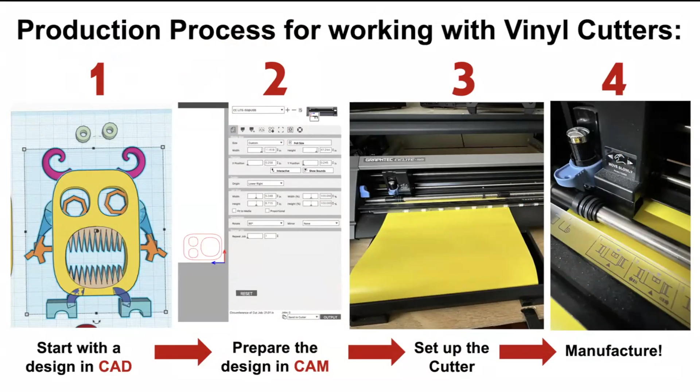I could then set up my cutter by loading the vinyl and manufacture it, and that would allow us to use the same Tinkercad designs, not to laser cut little plywood monsters, but maybe little sticker monsters instead. So again, these skills are very universally applicable. And so teaching, even if you don't have a laser, these skills can be transferred to a lot of different types of techniques. And that's a really exciting way for your students to apply their skills in a lot of different CNC production.